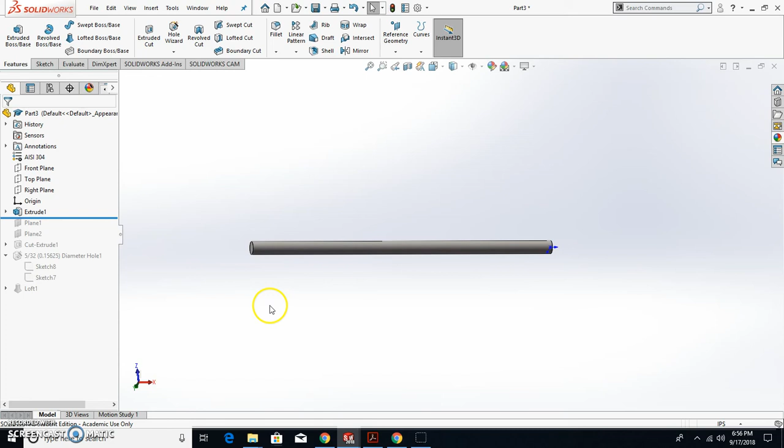Okay, now on to the screwdriver blade. If you take a look at the print here, the outside diameter of the blade is 1/4 inch, and that extends from this point to the end point. All right. So this part of the handle, we're going to use what's called a loft feature to do that part of the handle.

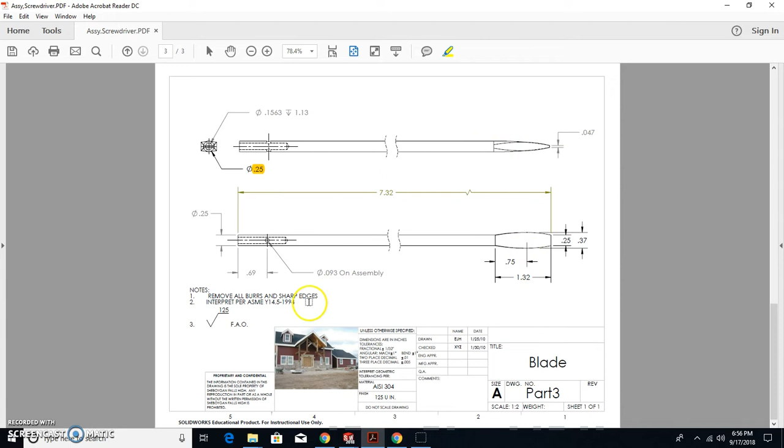So the first part again is pretty easy, that's not too difficult for you guys to understand. Again, there's a 1/4 inch extruded at 6 inches. All right, just a basic cylinder. Now from there, I extended 2 planes. So you're gonna create 2 reference planes off this face. I'm just gonna suppress the ones that I have there and show you how to put those in there.

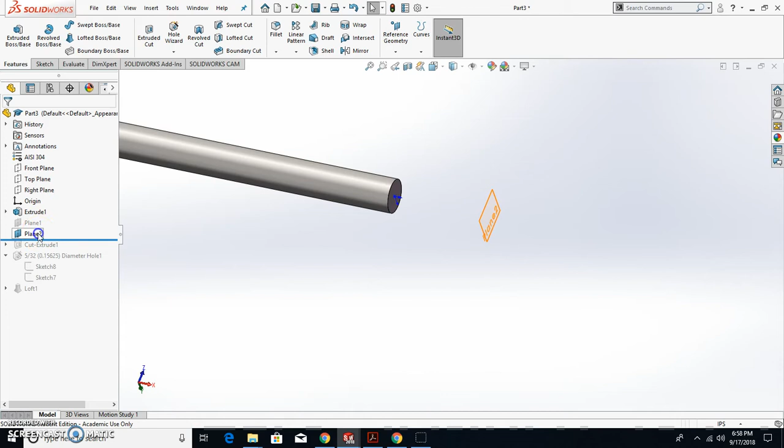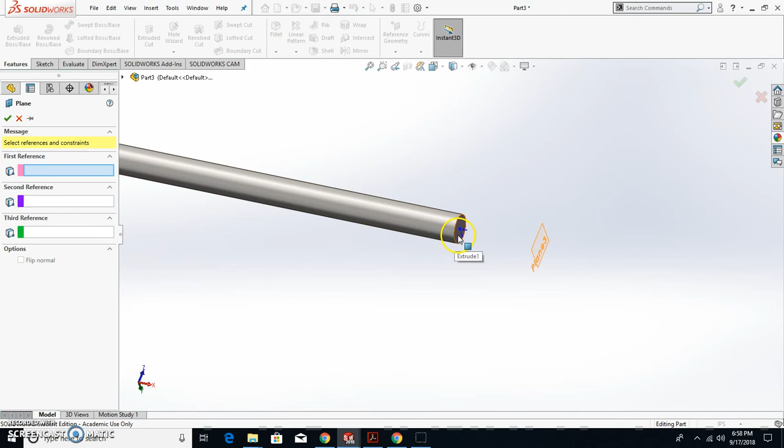All right, so you go up to reference geometry, go plane, pick the surface that you're gonna reference from, and you're probably wondering, well, where do I get that length from? So if you look at the print here, I give you 0.75 and 1.32. So you're going to make a plane at 0.75 and a plane at 1.32. All right, so the first one I'm going to put in here, 0.75, and then accept that. And then another plane from that face at 1.32 and then accept that one.

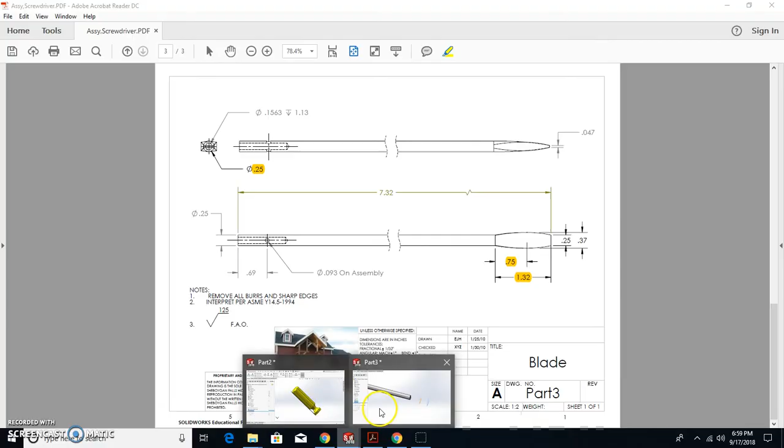All right, so what you can see here is you've got these. So we're going to take the geometry this shape, and then a rectangular shape, and then a rectangular shape, and then basically it's going to loft or create a surface between those 3 sections or cross sections. From there, all right. Okay, to create the loft feature, the first thing you need to do is create the 2 other sketches that you'll use to drive that feature.

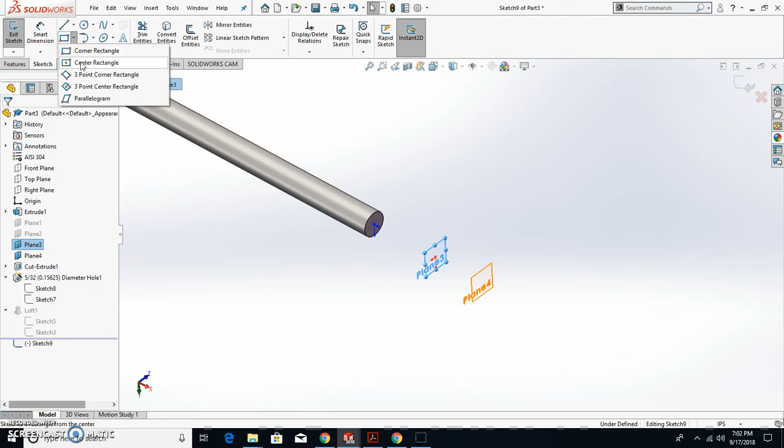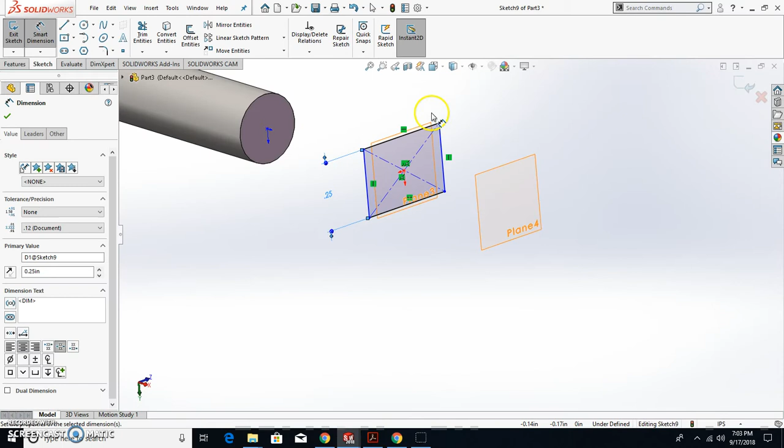So on plane 3, you're going to start a sketch. It's pretty important that you use a center rectangle. So from the center or the origin of that plane, you will apply the dimension 0.25, all right, by the other dimension I'm giving you here, 0.37. Okay, 0.37. All right, close that sketch.

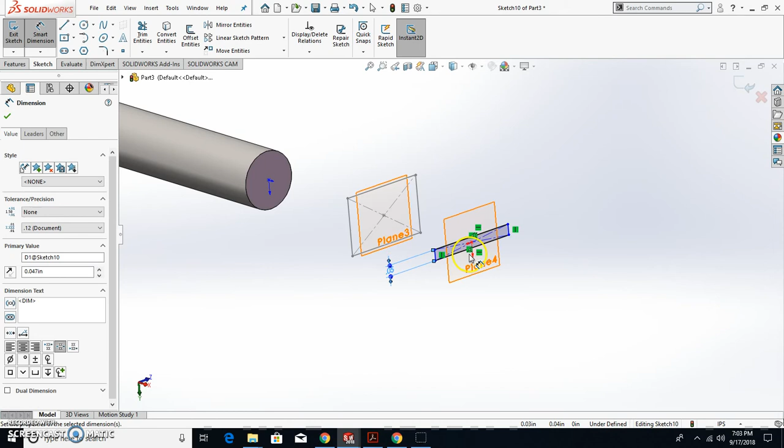Then on plane 4, you start another sketch, again a center rectangle. That'll be the end of the blade, and that dimension is 0.09, and then 0.25, or I'm sorry, 0.047. I don't know where I get that from, and 0.25. And 0.25. All right, and close that sketch up.

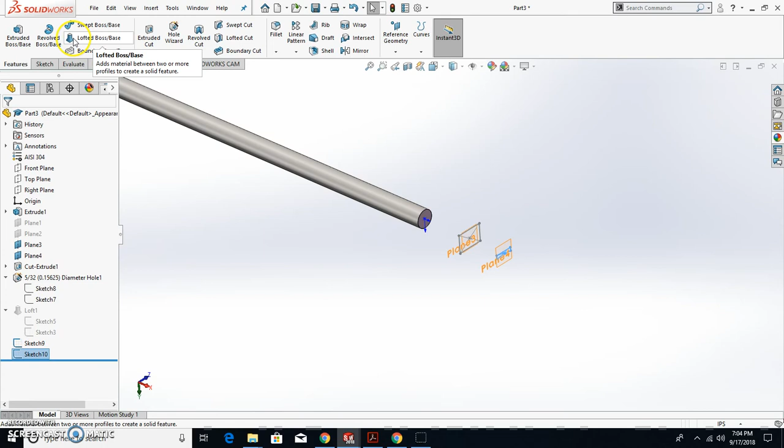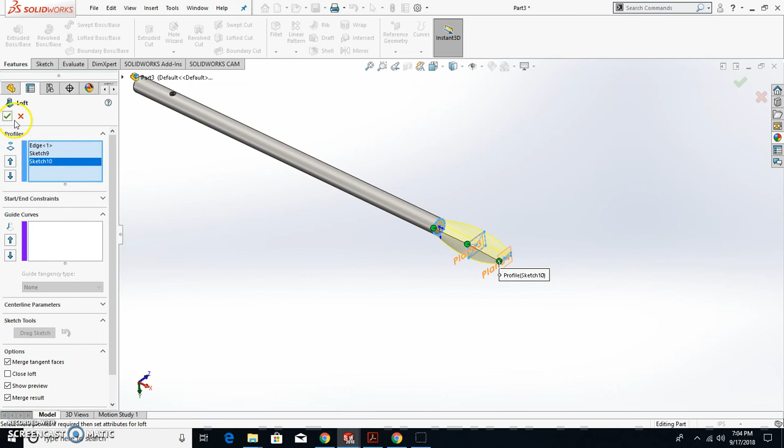All right, this loft feature is a feature from the home page here. So up top here, it's not a lofted cut, it's a regular loft. So we're right here, loft boss base. So we're going to clear those. Your profiles are going to be, and it's pretty important where you select these, I'm going to select the circle here, select this profile there, and then select that sketch there. And you accept that. And there is the end of our screwdriver blade. All right.

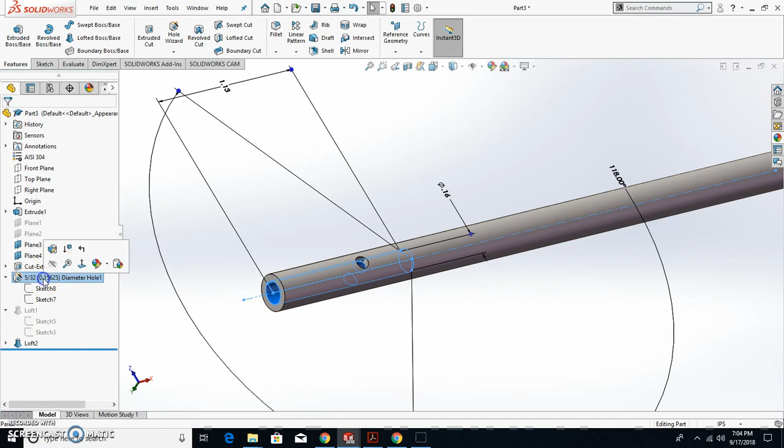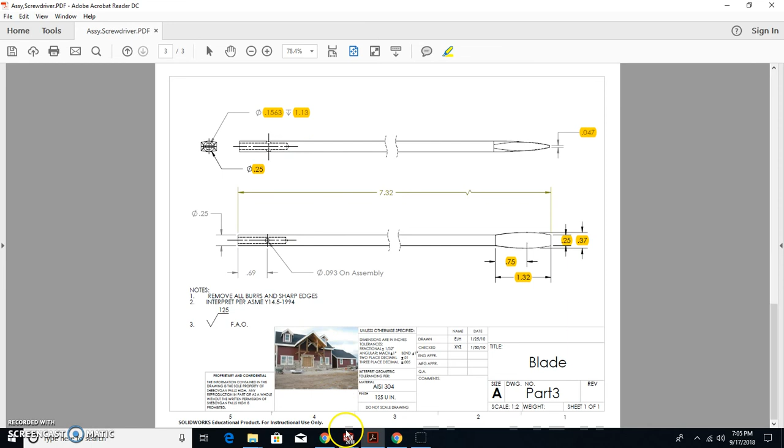As far as the other features that go on the end of this, I'll suppress the one I have there. That hole there, you can basically put that in there. You know how to put that one in there from before. The hole here, we've got a diameter of .1563 down to a depth of 1.13. Again, I want you to use Hole Wizard on that. So again, you don't need a sketch.

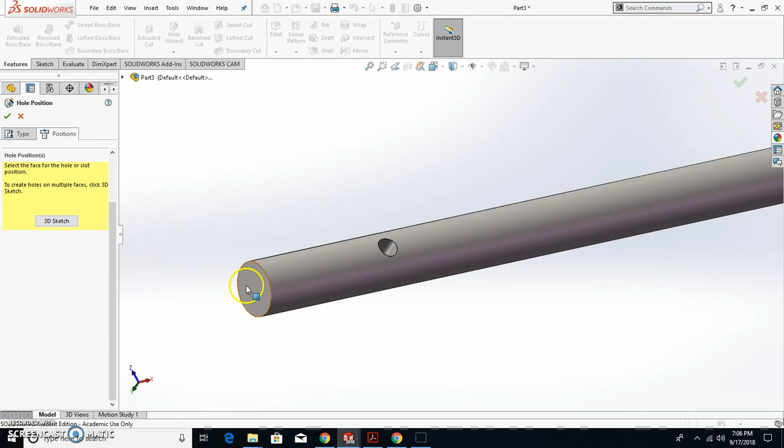You start a Hole Wizard, and it's a hole, ANSI inch. All right, Hole Wizard drill. It's ANSI inch, 5/32. It's going that deep. So again, positions, select the surface, select that endpoint, select the origin, accept that. And there that is. Basically, then, that is your part 3, or the blade.